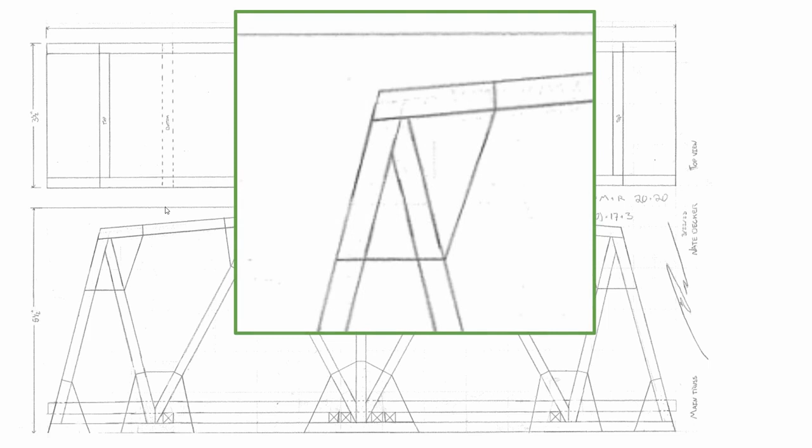I'll show you an example here. We're going to be looking at this top left corner gusset. Let's take a closer look at that corner. Three members are joined together in this corner, and two of these members are going to be compression members — they push together towards the joint. We're not as worried about the compression members because we're not as likely to see failure there.

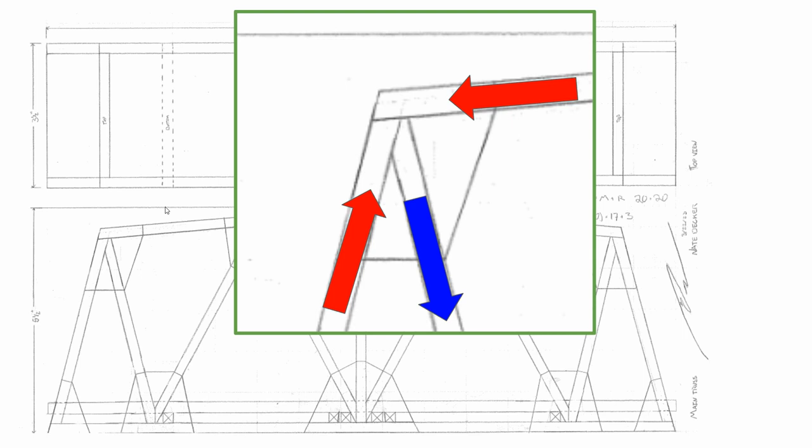This third member, though, the diagonal one in this case, is going to be a tension member. It's going to be pulling away from that corner. So our gusset's main job is going to be reinforcing that connection. We want to orient the gusset on the board so the wood grain is running parallel to the direction of the tension force.

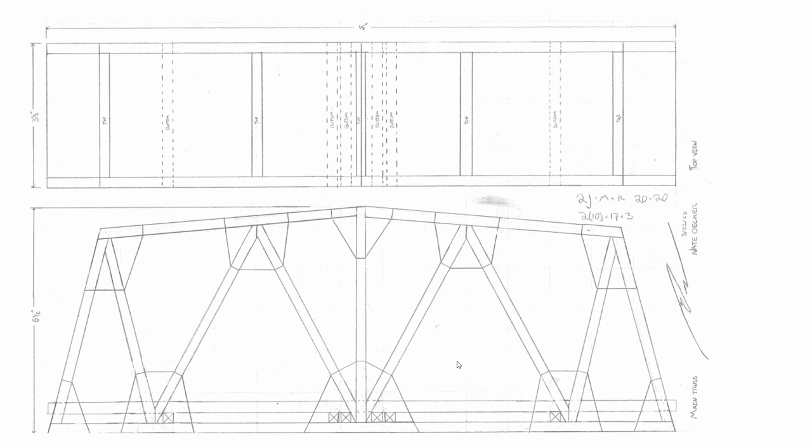Let's take a look at another example. This time we're looking at the big central gusset down here, because that's a very important one. The way the load is applied to these bridges directly in the center, this joint is really where most of the load is going to have to be absorbed and carried. So it's a very common spot to see failure, to see these pieces pulling apart.

Let's take a closer look at that joint. The two members across the bottom are going to be tension members. They're going to be pulling in those separate directions, which is not terrible because they're joined together by one solid piece of wood — there's not a cut, there's not a separation here, so I'm not too worried about these pieces pulling apart. I'm more concerned about the three pieces above.

With the downward force in the center, we're going to see the member directly opposite that going into tension, and it's probably going to be the greatest tension force on the bridge. It's going to be pulling upward, trying to tear these support members above away from the road deck members below. The diagonal members in this case are most likely carrying zero or very little force, but if they do carry some force, it's going to be tension in that upward direction.

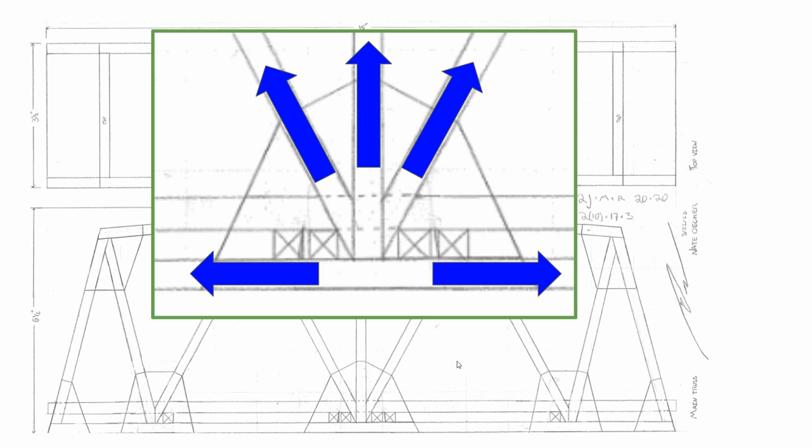So we've got tension arrows pointing all different directions here. How do we orient the wood grain to make this gusset as strong as it can be? Again, we're trying to prevent those top three members from tearing away from the bottom ones. So we want to orient our gusset so the wood grain is running parallel with those arrows.

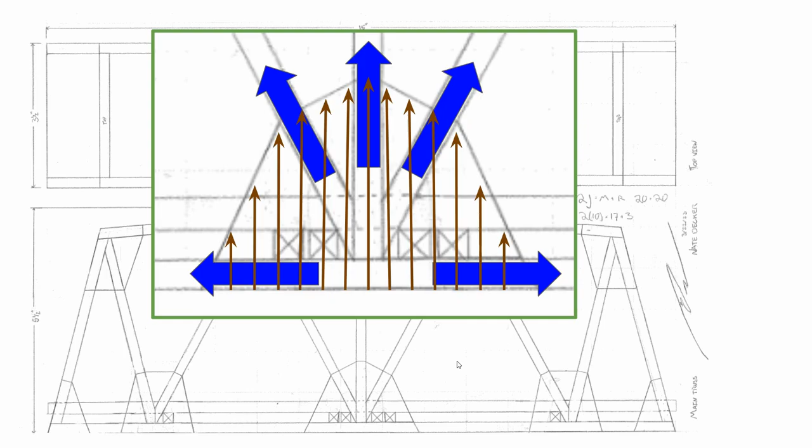So now we are in Adobe Illustrator. You could use lots of different programs to create artwork for the CNC laser — CorelDRAW, AutoCAD, those are popular ones. Autodesk Inventor works too, but we use Adobe Illustrator.

So if I click New File, I can start getting things set up. I'm going to create an artboard that is the size of one of the pieces of balsa wood that we have in the shop. First I'll switch my units from points into inches, and enter the sizes of one of those pieces of balsa wood, which would be 36 inches long by 3 inches high. When I click Create, I get an artboard that looks just like one of our strips of balsa wood.

Your scanned one-to-one drawings should be in the S Drive folder for this project. So I'm going to click File, then Open, and go searching for those scans. For POE, you'll find them in the POE folder. For Makerspace, you'll find them in the Makerspace folder. Bridge scans number 1 — I know I want page 4, so I'll type in page 4, and there we go. I've got my one-to-one scan of this drawing pulled in.

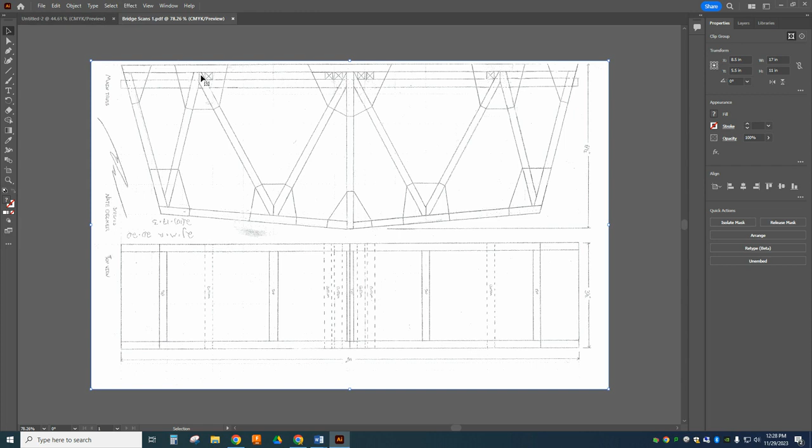Now, it opened it up in a separate file here. I'm going to click on the drawing, copy it with Control-C, and paste it onto my piece of balsa wood. Now you can see the relative size — the balsa wood is at true size, so is the bridge, and we can see how large this is, relatively speaking. Now I'm going to rotate this just so it's right side up and I can see what I'm doing is accurate.

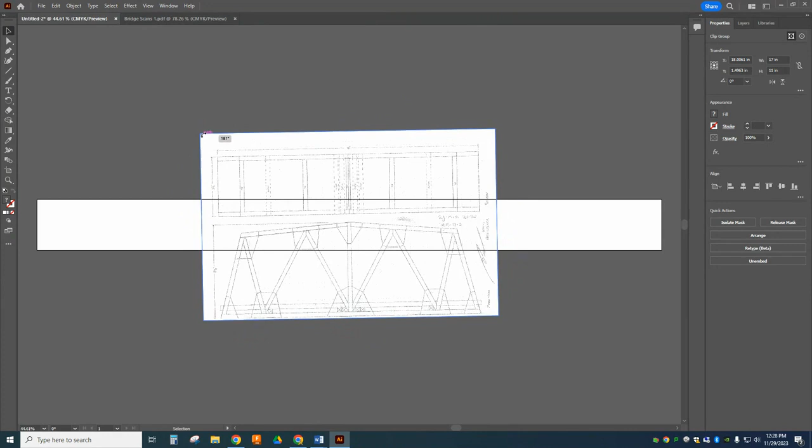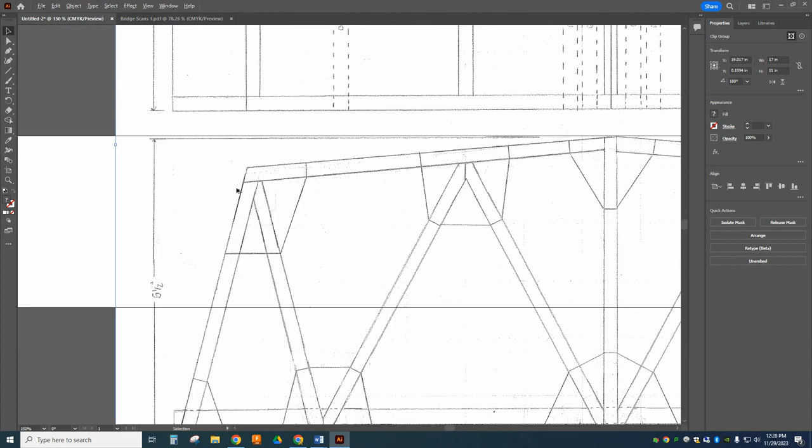And now if I zoom in on these gussets, I can get as close as I want to them, and trace these outlines with the line tool in Illustrator to make sure I'm getting my gussets exactly the right shape and size. So let's start with this top corner. I'm going to go find my line tool. If it's not selected here, it might be the rectangle tool by default, but just hold your mouse button down and you can switch that to the line segment tool. Now I can click and draw my lines and trace the outline of this shape.

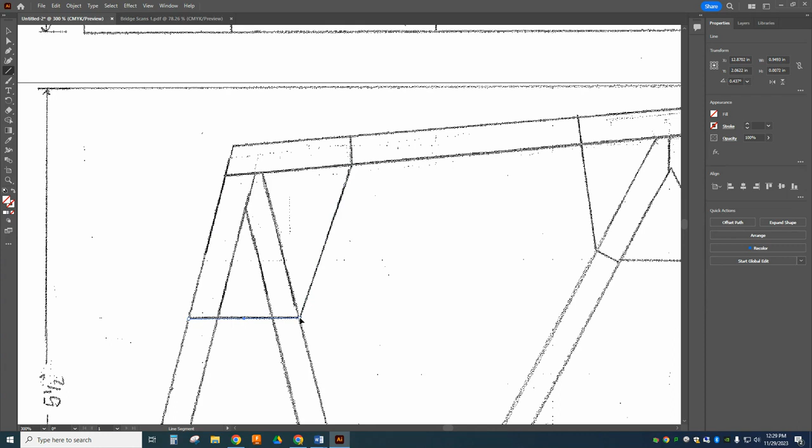I'm trying my best as I do this to make the corners link up with each other. Right now, these lines don't really look like anything because they have no thickness. I'll click back to my arrow, drag that sheet out of the way, and now I can select all of those lines that I just placed.

With these selected, I can look over here on the right-hand side and see what my stroke is. This part's really important, so we've got to get this right. Right now, there is no stroke, that's why I can't see it. It has no outline at all. I want to switch this to something that has color I can see, so we'll make that black.

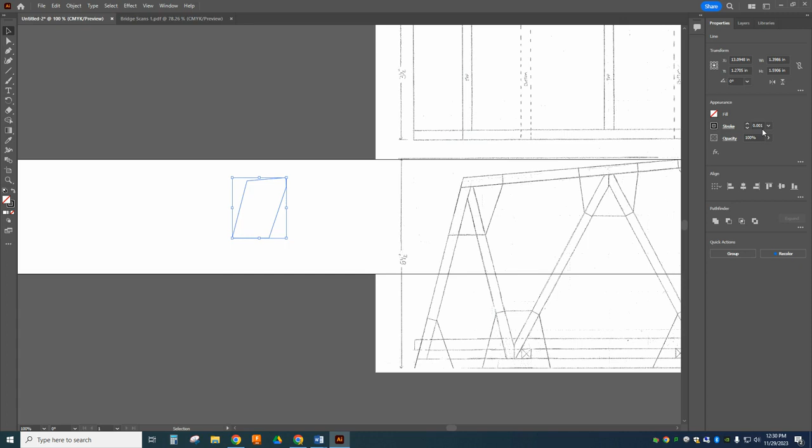By default, the thickness comes out to 1 point thickness. That is not thin enough for the laser to recognize it as a cut line. The line thickness is how the laser tells whether it should engrave something or cut something out. If we don't get this step correct, it's going to just engrave the outlines of your gussets on the wood, and it's not actually going to cut all the way through them. So I've got to make this thinner. 0.001 will do the trick. I'll change that thickness, and you can see that this just changed thickness in response.

Now I want to reorient this so that it is in the orientation that we saw from before. I want to try to get the wood grain running in the direction of these brown arrows. So that means I've got to rotate this, and I'm sort of eyeballing it, rotating it to about that angle right there. Now I can drag this off and situate it in the corner of my piece of wood.

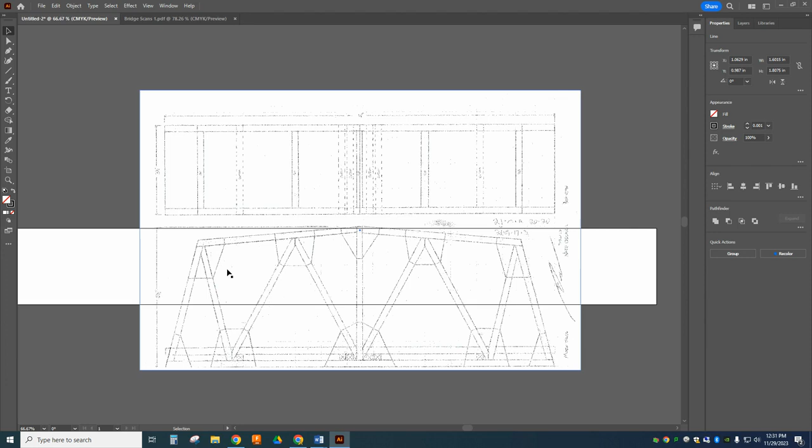And let's think. That gusset is identical to the gusset on the opposite side. I want to build this bridge with a gusset on the inside of the joint and a gusset on the outside of the joint. So that makes 4 of these gussets on the left side of the bridge and 4 of these gussets on the right side. That means I'd like 8 of these total.

So maybe it took me a couple of minutes to do this setup, but now I can simply Control-C, Control-V, and copy my gusset right next to the other one. And now I can select both, Control-C, Control-V, and I've got 4 gussets. And one more time, Control-C, Control-V, and I have 8 of these gussets. Way faster than cutting all 8 with an X-Acto knife.

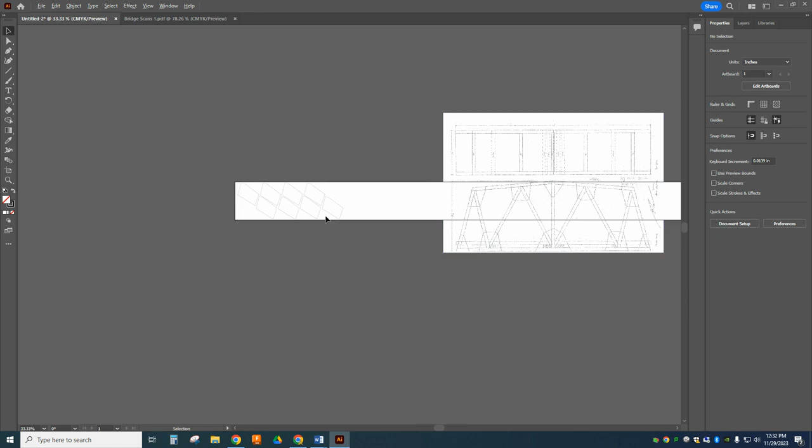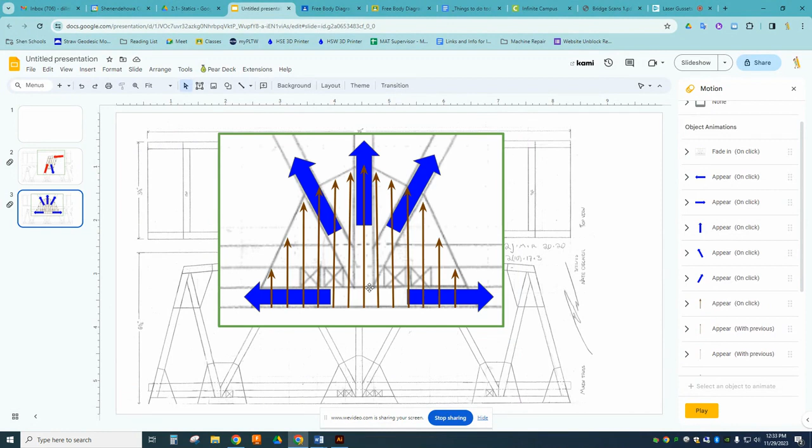Now I can work my way down the entire board, doing this over and over again. Let's just do the other center gusset here to drive the point home. Now we wanted these gussets to be running in this direction, so I've got to turn this gusset 90 degrees on the artboard.

If it's not perfect, it's okay. And I'll want an inside gusset and an outside gusset on both sides of my bridge for this. But notice something interesting on this one: we have these cross members running through the middle, which are going to be sitting on top of this lower truss member. And if we want to put a gusset on the inside, that gusset needs to make way for these. So if we want that gusset to actually reach all 5 of these members that are connected here, that means it would be nice to make openings for these cross members that are just the right size.

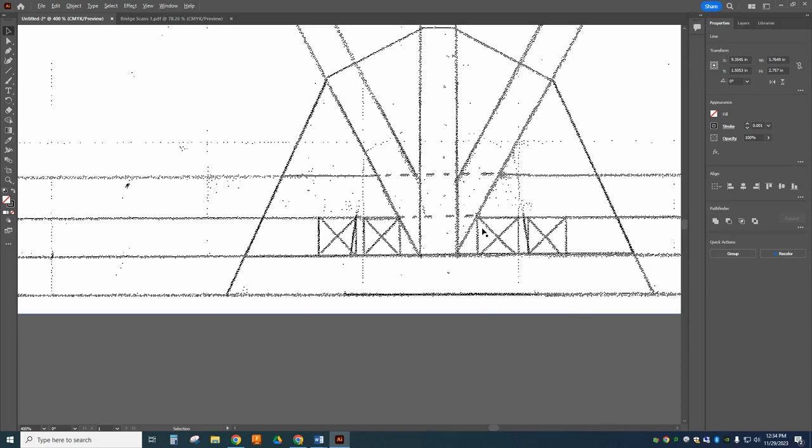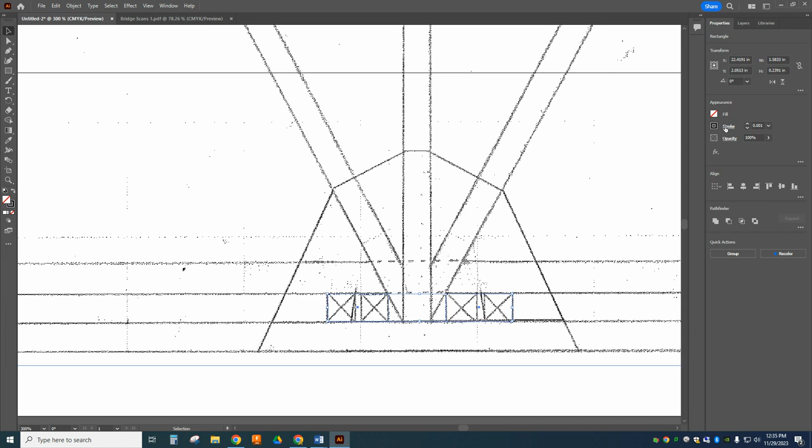So what I can do with that is make a copy of the gusset and place it where it needs to go. And then again, I can use my tools. In this case, I'm going to use the rectangle tool instead of the line tool, so I don't have to draw quite as much, and I can draw rectangles where these 2 holes need to go. If I select those rectangles, I can verify that the stroke is correct.

And I can move my drawing out of the way. And now I have an internal gusset for that joint, and I have my external gusset for that joint. And I can make the copies of this that I need for the other side.

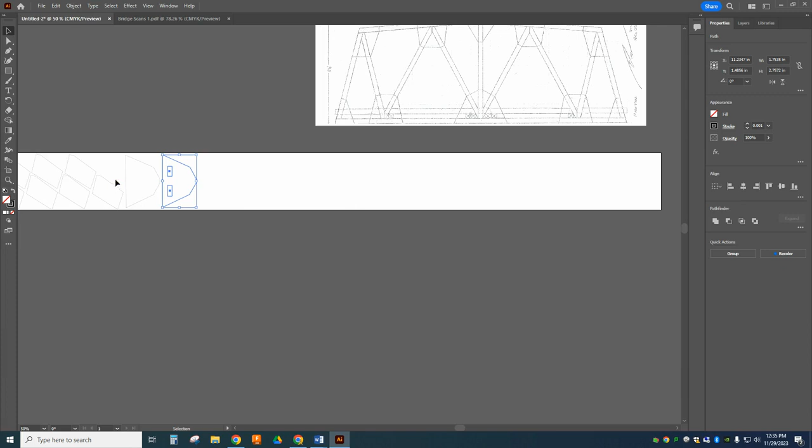Once you have all of your gussets laid out, double check that all of them have the correct stroke, the correct line thickness, and make sure that your file, your Adobe Illustrator file, gets saved, File Save As, in the class folder, the same S drive folder where you found your drawing scans. We'll need to open it from here when we get over to the laser. Good luck.